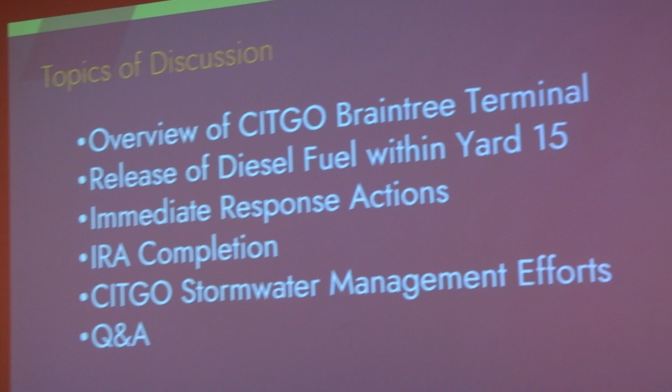So, Don? Thanks, Doug. You guys hear me okay? All right, I usually don't need a microphone. Do we want to slide ahead to the overview? Sure, let's see, where are we at?

Okay, so first off, once again, my name is Don Griffin. I'm the Environmental Health Safety Manager for CITGO Petroleum. My region is the Northeast, so I live in New Jersey, and I have the region from New Jersey, New York, on up through the rest of New England, up to South Portland, Maine. I've been with CITGO for over 27 years and had some prior consulting years before that. Doug and I have worked together on the remediation of the CITGO property and some of the off-site locations and properties around Quincy Avenue over the past 25 years, and we've been pretty successful in bringing those to closure thanks to his diligence and his subject matter expertise.

So what do we do at CITGO? You probably are already aware, but I just wanted to state the obvious. CITGO is a 62-acre property. It dates back over 100 years. It was originally a refinery back in the old days, and it's gone through different iterations to the point where some of it was obtained by BELD, where you have your electric plant. In the upper right corner there, where you see the blue top buildings, some of it was sold, I believe in the 80s, to Clean Harbors, and where you see the white circles, those are our storage tanks, and this black...

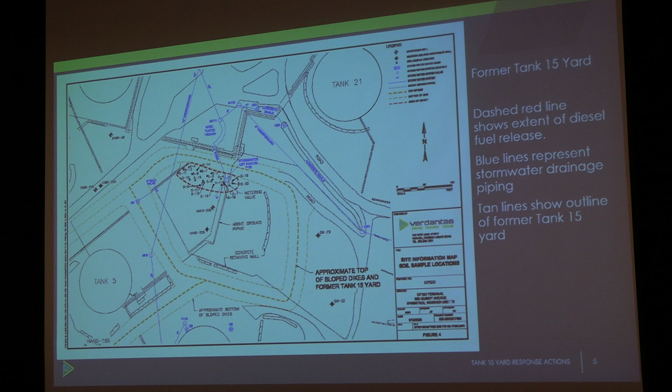All right, so here's a slightly different view of the facility, but what I want to show you here is the key features for tonight's subject, which is tank 15 yard. This is 15 yard. We keep calling it former 15 yard because it used to have 3 above ground tanks dating way back, and those tanks were removed at least 20 years ago.

Today it's just an open diked area. And when I say diked area, that means it's surrounded by high walls of impermeable material, and the floors are impermeable. That's how they were constructed, and obviously that's there to contain releases of petroleum, should they happen.

And then the blue right here, actually all the blue lines here, these are the various components of our stormwater drainage system. It's a large property, so there's a lot of different pieces to the stormwater system.

But all that stormwater that gets treated through here eventually winds up down here. So a lot of this facility's stormwater is captured within these diked areas, which means rainwater falls, it collects, and it can't go anywhere until a CITGO operator activates a pump and pumps it out. What doesn't fall within a diked area falls within what we call the free flow area, and that's actually a smaller percentage of the total stormwater that falls on this facility.

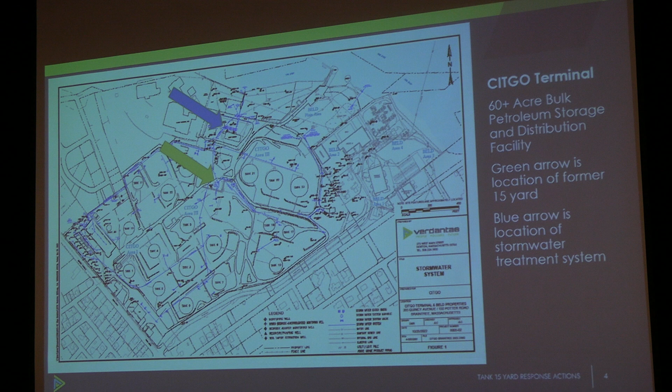So zooming in here, this is the former tank 15 yard. There are no tanks there today, but we do have these active pipelines that go through the diked area here.

This is the metering valve here. So what that was is a valve on the pipeline that historically was used to inject red dye into the product.

And if you don't know this, diesel fuel and heating oil are essentially the same thing. The heating oil is dyed red to distinguish the two, because that is not taxed and diesel is taxed. But CITGO changed that operation, or that procedure, some years ago, and so that metering valve is currently not in use, and that's where the leak happened, or the release occurred.

Also in this picture is what we call our stormwater lift station. As I described, the stormwater falls in these diked areas, it accumulates, and the pump to move that water out into the storm drain system has to be activated manually.

And so from there, the stormwater goes out and joins the system here, and then off it goes further to the north to the stormwater treatment system.

All right, so just to review the sequence of events that happened: we do know that on February 10th, that is the last time that lift station was operated within the tank dike area. Don's going to speak to the circumstances of that and the actions that have been taken by CITGO to remedy that and improve the process.

February 15th is when the release within the tank dike area was discovered by CITGO. Understand that diesel fuel, when it's not dyed, is clear and doesn't smell or behave anything like gasoline. We're all used to seeing and smelling gasoline, and it's very pungent, but diesel fuel is not like that. And remember, this also took place during the winter in February—it's cold out, suppressing the vapors of it.

So February 17th is when the event at Clean Harbors occurred, and you've all heard about that. I think most of you were at the meeting on Monday, so you know the circumstances of that.

February 24th is when a sheen was noted in the water leaving our outfall into the Fore River. That's when we notified DEP of that additional event. They had already been notified about the release within the 15 yard, and were understanding all that. And then when the sheen occurred, they were called again.

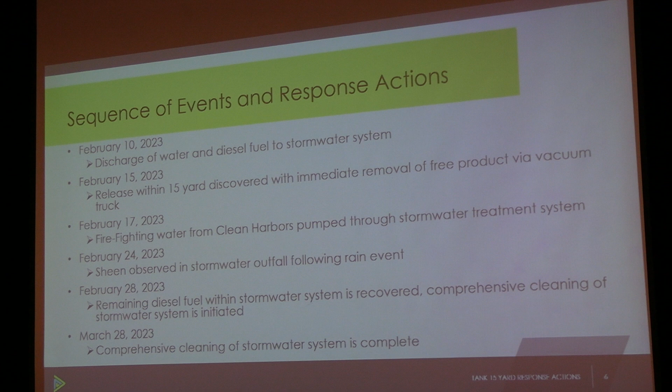Do you want to take this part, Don? Sure.

I've got a slide a little later on that lists all the different stormwater improvements we've made. But as I indicated earlier, the facility is about 100 years old, so the technologies have continued to improve. We're always continually trying to stay ahead of the challenges that are out there as far as new technologies.

So what we're looking at here is a pair of oil water separators. They're in-ground tanks, each 15,000 gallons, with a flow capacity of 3,000 gallons per minute each. We put two of them next to each other, so that in a circumstance where we need to take one offline to clean it, the other is still in operation, giving us better operational flexibility. This is actually our site with them being installed.

Preceding this, upstream, is a 6,000 gallon per minute Downstream Defender Vortex unit, there to remove sediments and solids. The water is treated before it's discharged out our outfall under the US EPA's NPDES program.

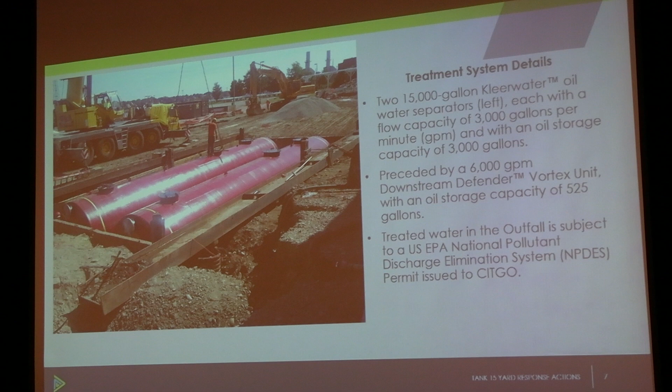So we had 5 projects, totaling almost $10 million that we've spent since 2005. It was almost all installed by 2012, right? So over that period of time, we were able to do those in succession.

Oil floats on water, it's lighter, with a lower specific gravity than water, and as long as you give it enough time as it flows through this, it will separate out through physical separation. The oil will rise to the top, and then we can collect it.

Well, hold on, before I jump to that slide, I'm gonna go back here. So, like I said, this is from the manufacturer, and this is pretty much true of all oil water separators: they're designed as a primary separation system for the removal of free oil, so floating oil or grease.

The oil water separators are not going to remove heavy greases or real heavy high gravity compounds. They're not going to remove dissolved hydrocarbons, and they're not going to remove volatile organic compounds that are dissolved in the water. They'll only remove free oil globules and things like that. And it's imperative that you do not introduce a high alkaline or non-biodegradable detergent or solvents. You cannot put those in there.

To put it in layman's terms, you cook something in a frying pan and you use Dawn, you squirt some in there, it cuts the grease and it flows away with the water. If you put any type of soap or solvent or detergent into an oil water separator, it will put the oil into solution and send it out. That's what solvents do. So they're actually specifically restricted from being used. We don't clean our truck rack or any of our areas with any soaps or solvents for that very fact, that it will inhibit the separator's operational function.

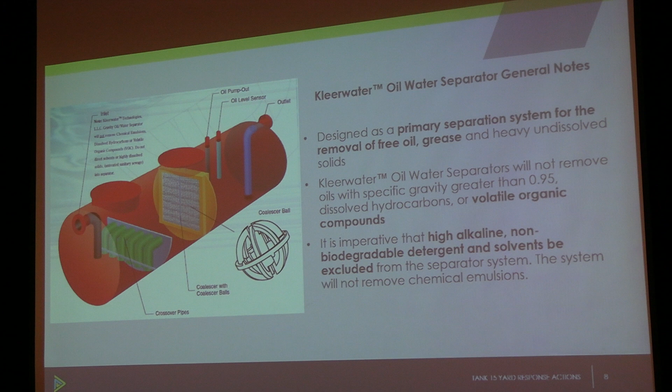I'm going to move to the next one here, and hopefully, I don't know how I get to, can you hit play for me, Brooke?

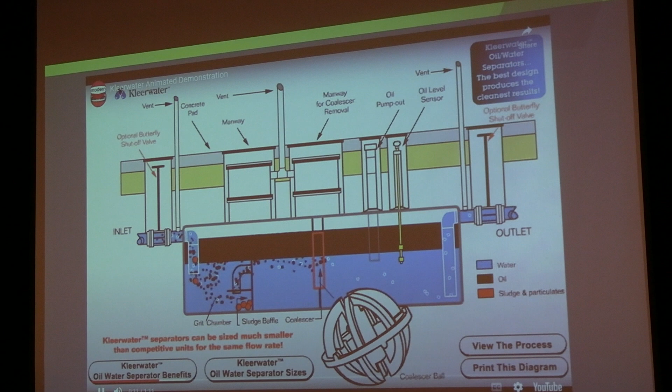So this is sort of an animated demonstration from the manufacturer, and this would be a system that has a lot of oil flowing into it. So you have the inlet, it comes in, and oil globules will start to rise to the surface. Anything that's entrained in the flow stream, it could be moving fast, will end up coming down here and has to go through these underflow pipes. It's kind of getting ahead of me in the sequence. And then what doesn't float to the surface here, when it gets to this coalescer pack, starts to rise to the surface. And then you have oil floating on the top.

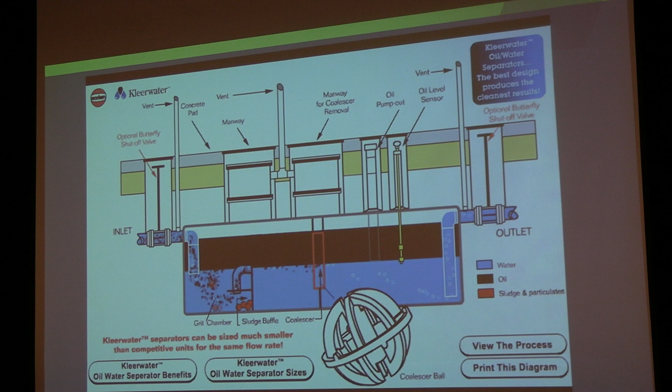We check these oil water separators at least once a day, and if there's any oil in them, we'll have it removed. It's not uncommon, but it's also not a daily occurrence by any means. All right. I'm going to turn this back to Doug here to speak about the IRA completion.

So when releases happen like this, we are required to contact Mass DEP. A sudden release like this is a 2-hour notification, which means as soon as we find out about it, we get notification to DEP. In the case of CITGO, they also have notifications to the National Response Center and the Coast Guard, because the Coast Guard is very much involved in the operation of this facility. As soon as we realized what the release was, we had a vacuum truck out there right away, and 98% of this release was vacuumed up within 24 hours.

You've all seen the Clean Harbors vacuum trucks around. They're very powerful, and they just suck the oil right up and don't leave a whole lot behind. So most of this was taken care of within the first 24 hours. There was some residual impact in the soils, but these tank dikes are designed to be impermeable, to contain releases like this. The bottoms of these tank dikes are primarily clay, so it really didn't soak into the ground very far at all. But we did excavate some amount of soil.

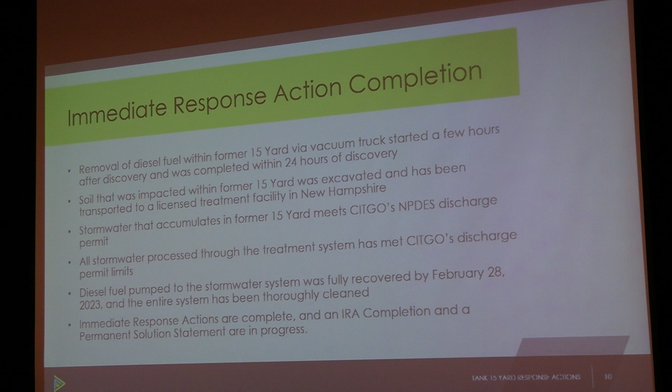I know I spoke a little bit about this, got ahead of myself, but some of the things that have taken place were the replacement of the facility oil water separators with the 2 units that we have down there in addition to the vortex sediment removal unit. We also replaced the loading rack oil water separator and upgraded its flow capacity.

We also did a lot of work to segregate what's known as non-contact stormwater. So what falls on a roof is not coming in contact with a petroleum product. It's not picking up any other types of contaminants or sediment. And so what you want to do is keep that separated and not try to run that through your separator. It makes the separator more efficient at removing the streams it's supposed to. So we did some segregation of non-contact water.

Our truck staging area, which is behind the, if you're familiar with the garage building that's adjacent to our exit area, we had to dig all that area up and replace the drainage piping and put new asphalt down there so that we could contain any potential spills from anything that occurred in that area.

Just as I said, the facility is 100 years old, and so there's stormwater conveyances of every vintage there. But I believe we've got most of them replaced and upgraded, and so we've been continuing to do this. They do a regular inspection of our stormwater drainage basins to remove any accumulated sediment.

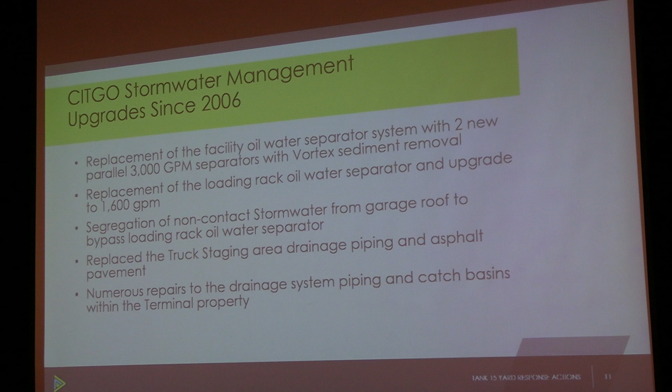If they start to notice that something is ending its lifespan, then it's something that we'll go in and we'll replace a manhole, a catch basin. So we continue to do that and make improvements to all the piping and catch basins that are part of our site-wide stormwater management system.

So we're here speaking about the Tank 15 response. And so probably a lot of you are wondering, well, how did it happen? Look, it's regrettable that we have a spill at any point, but it is always a possibility. And so, mechanical failure of a fitting on a pipe released product.

And so what we've done is we've made improvements in the daily inspection methods and established routes that the inspectors have to take when making these inspections. Without a doubt, the operator was experienced, and he was certain from the position that he was making the observation that it was water and nothing else. He's done it for 20 years, and he wouldn't have been reckless.

But we just have to be better at that, and so now we have a designated written path by which they must go to make an inspection of water, be absolutely certain, even if it means you can't just look at it, you gotta dip a cup into it, whatever it takes.

So we made that improvement when they're making those inspections. And as far as our response plans, I know that's been a topic that became elevated with the incidents that occurred shortly after the discovery of this leak. And so what we've done is gone through our response plans, made any updates that were required. We had a couple of position changes in our corporate listings and things like that.

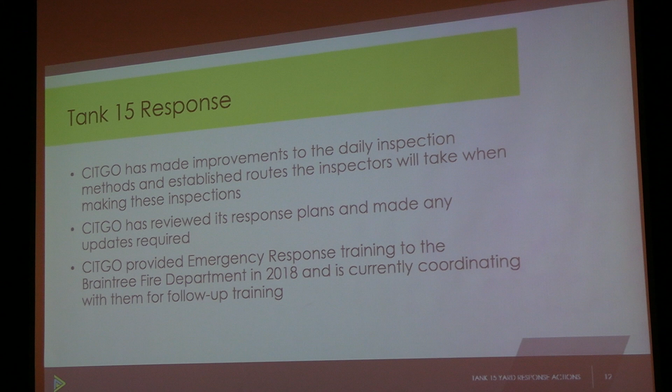All right, I'm going to toss this back to Doug. There were some questions that came up on how to access reports online that get submitted. So I'm going to give this back to Doug.

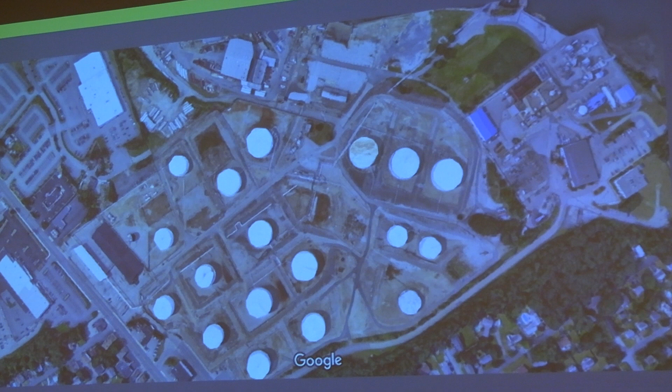One of the recent changes you've made is tank number 2, I believe, and it is out on the water side, and you went before the planning board just a couple years ago, and you were not required to disclose why you were putting in a subdivision for that tank. That's been something that Mike Lang has talked about quite frequently, in fear that you have some sort of a design for that that could pose some potential threats. And for some reason, you were not required to disclose what the purpose of that is.

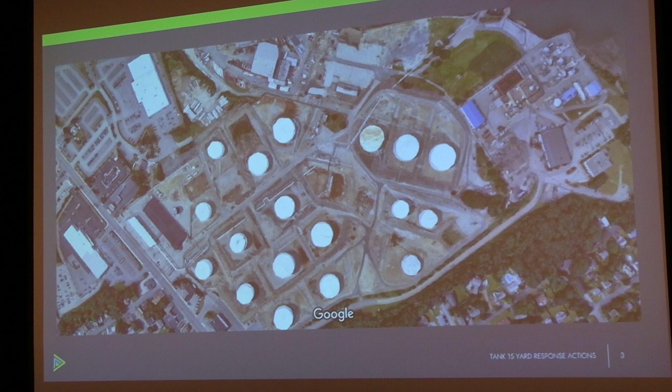So, the other piece is that sea level rise is happening. And in that back section, back when you used to invite members of the community in to walk through, a few of them questioned the fact that the foundation for that tank wasn't actually rebuilt. There's just some rotten pilings that were sort of shored up. And when we see the kind of sea level rise and the degradation of the edge of the water that's happening, there's a huge concern from all those little houses near me and across the street from you that the tank that we don't know what it's for is precariously resting on rotted wood next to the water that is rising.

I'm sorry, but tank 2 is... keep pointing at the screen. She's got it. There it is. All right, so tank 2 is located here.

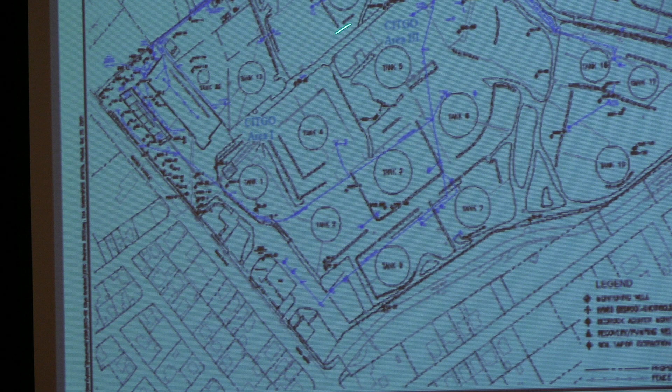Then it may not be tank 2, or it may be 2 different tanks. The subdivision area, Doug, was which area? This area. So it was 2. Okay, so that one is by Quincy Ave? Correct, that's the subdivision. Yes. This is Quincy Ave. It's important to note that the elevation drop is considerable from the street level, or where the office building and the truck rack is. It's approximately 60 feet down to the water's edge.

So then what is next to the water's edge? We don't have any tanks in this area. A 100-year floodplain comes in somewhere around here. Joe's my Concom expert, so that's pretty close to where the 100-year floodplain is on our property. This being our boundary with BELD.

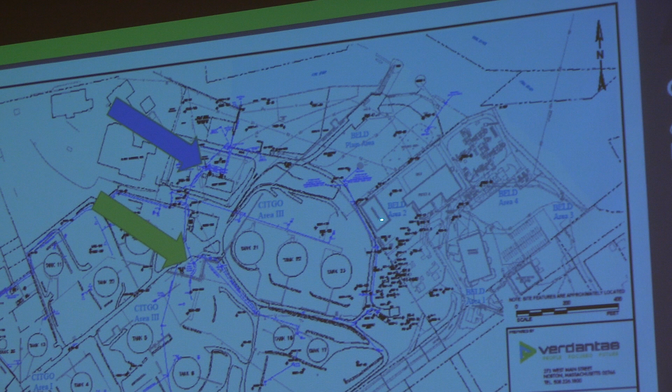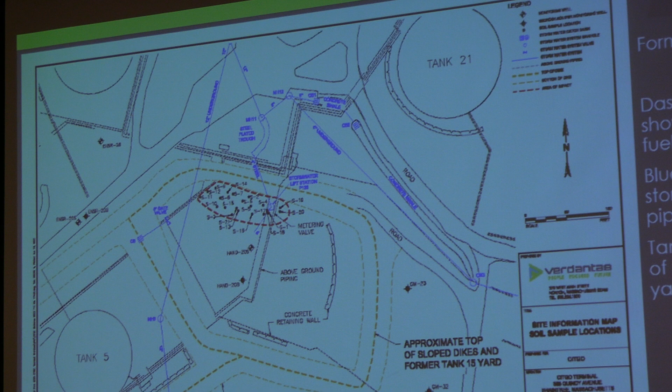So where do the tankers unload into? That would be at our ship's berth, which is located right here, and it's better illustrated on the Google Earth image. I'm sorry, I did a terrible job of cutting it off, but this is our ship's berth right here.

Okay, so then I might be conflating the two issues. Let me back up, and I will follow up, or hopefully Mike will get here before the meeting ends. So let's take them as separate issues then. Tank 2, what was that subdivision for? And how will we know what you're doing with it and when that happens?

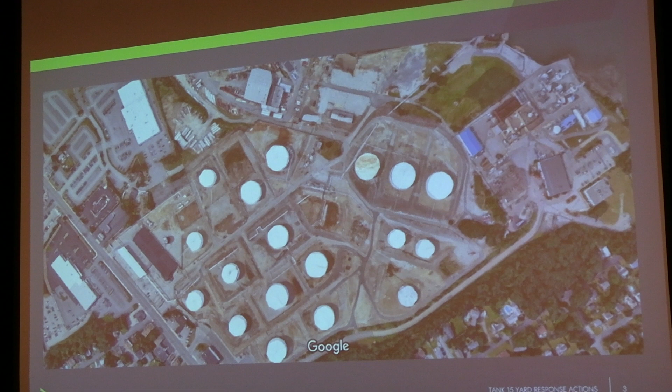I was heading it to you. It had to do with zoning changes that the town was proposing, that aren't an issue any longer. I don't understand.

Can I say something too?

The whole purpose of that was to give CITGO leasing opportunities, because there's potential for product storage by another petroleum company on the property. That was the reason for that.

As you mentioned, things operate differently than they did 20 or 30 years ago. I've seen the industry mature considerably in my tenure. One of the things that's very different is that it used to be you had a CITGO terminal and a CITGO refinery, and you made your product and shipped it to your CITGO terminal and only wanted to sell it to CITGO service stations. There just aren't as many of those around anymore. The competition is considerable, and folks have found ways to distribute these energy products in different ways.

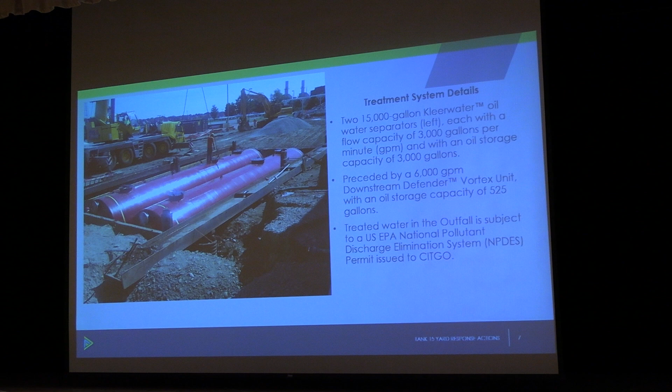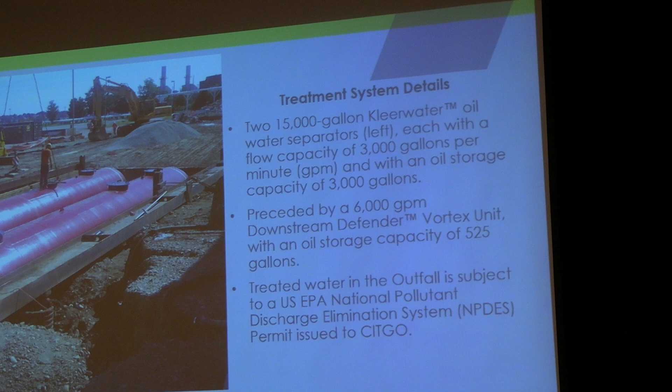In just a few gallons, if they see a sheen, they're going to bring in a vac. If it's a sheen, they may use a sorbent pad. If they see anything more than that, they would bring in a vac truck to remove it, because to get that 36 gallons out, you're also going to take out 600 gallons of water with it.

And the vortex unit, because of the way the inlet and outlet are designed, maintains a certain head of water inside that tank, which backs up into the pipe and maintains that head up into the pipe. And of course the oil will float. If you have 804 gallons of oil, it's going to float in that pipe. But somehow 36 gallons got through there and into this system, which is downstream of that.

So it's not guaranteed that the vortex itself—I assume at the top of the vortex unit it has space for 525 gallons of oil—so the 804, if it did get through, would have gone into this tank, the vortex unit, and gotten held up to the amount of 525 gallons. If you look at that on a daily basis, it would have been discovered and you would have pumped that out.

So I'm going to get to my point in a minute. You also, with that 636 initial gallons of waste—water, it's water and oil—it was actually recorded on the manifest as a waste gasoline mixture. That's the way it went out of your property, as a waste gasoline mixture.